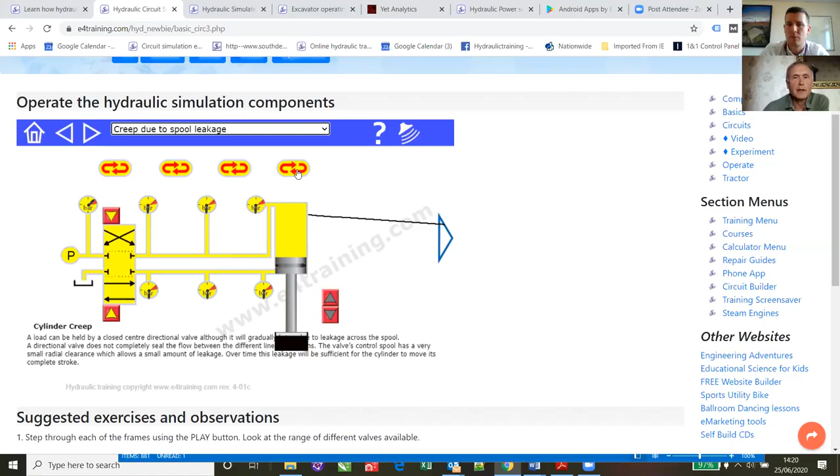So with training, it's a lot of knowledge-based learning. You can learn from books and lectures, but actually with engineering, you need experience to operate things. So what we can do here is build simulations of circuits. We can put in the valves. So we've got a lot of virtual test rigs where they're actually simulation-based rather than animation-based.

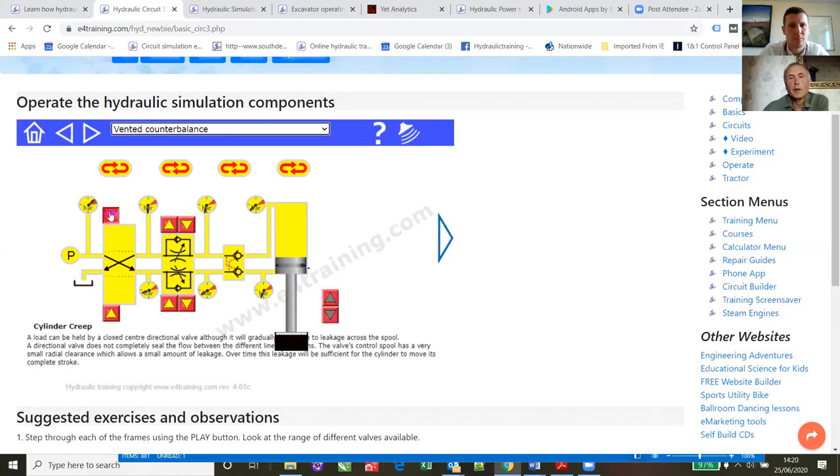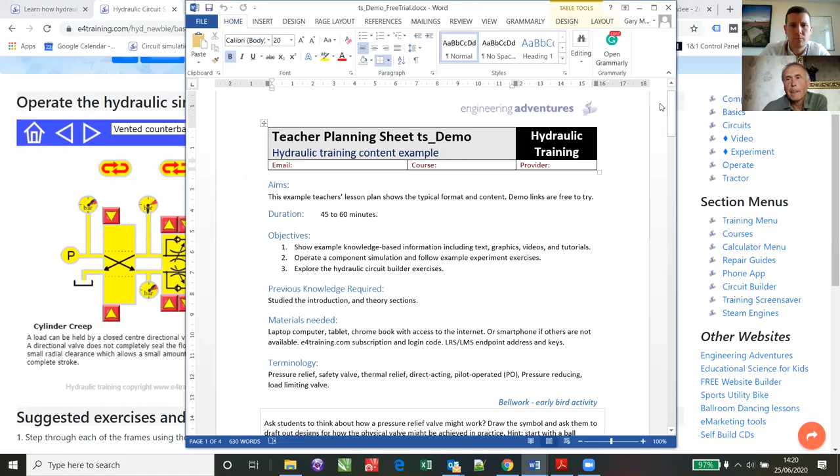You can change the features and operate the equipment. So it's nice and easy to do within a lesson. You can give the students little exercises to do. So we'll show you, hopefully, work through our lesson plans. We've got some lesson plans that take you through what you would do in a lesson and what you should be giving your students. So it's taking the hard work out and showing you some of the simulations.

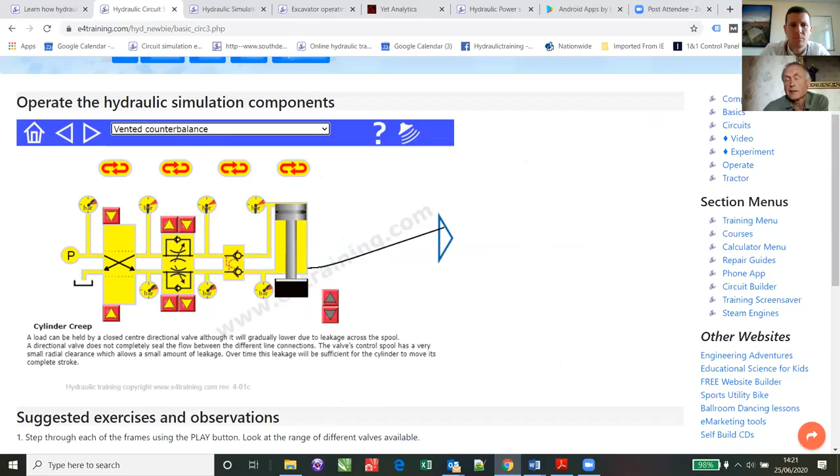So we'll just go through. I'd say that this actually is for classrooms as well as for COVID and working at home remotely now. I think I'm the only person who's been writing classroom lesson plans during lockdown.

But let's start with a website. The big problem with websites is that it's difficult to find information. So I'll just give you a quick sight of all the simulations and all the content we've got. So these are all the simulations. We've got calculators, lots of different calculators that you can use for checking if you're working in hydraulics or checking your calculations while you're learning.

Micro-tutor, but these are tutorials. So there's quite a few little interactive tutorials the students can do. Videos. There's an awful lot of videos now. And some worksheets. So these are the guides for doing things.

So one of the real benefits of teachers is that teachers are very good at sorting through and giving the students what they require. Websites, unfortunately, the more I put in, the more difficult it becomes to use. So it is a problem with websites. Hopefully I will show you how to get around that today, but one of the things that teachers do well is they know how to feed things to their students. And even now our lesson plans are hopefully good, but they're in Word, so you can adapt them for your students to show them how they do it.

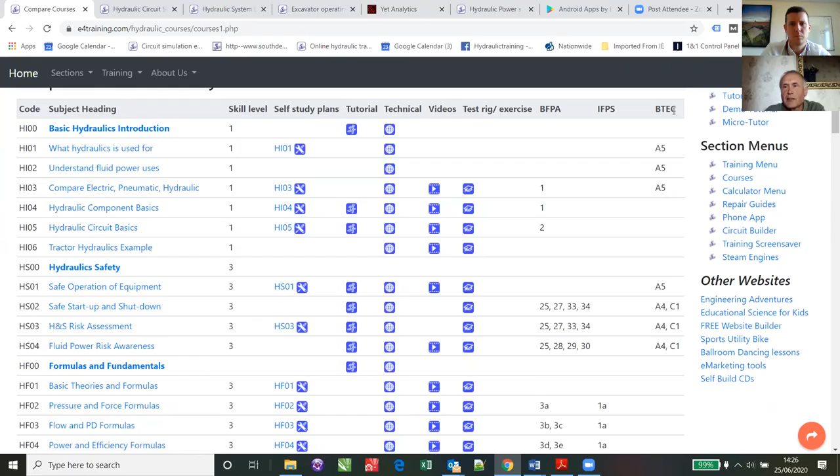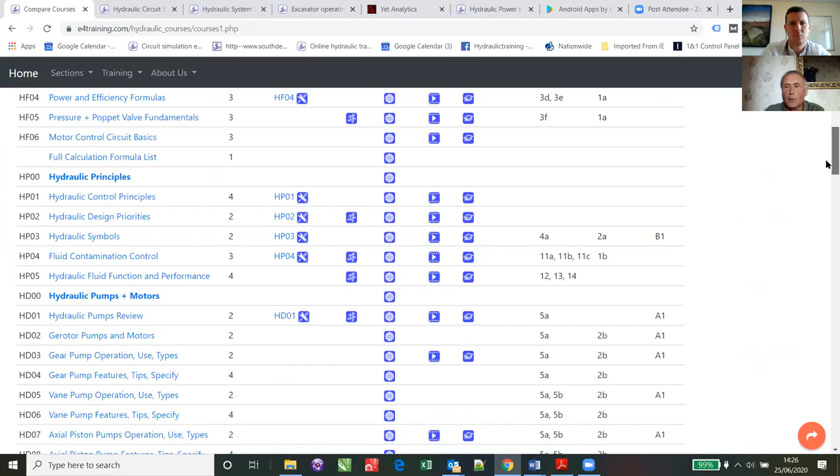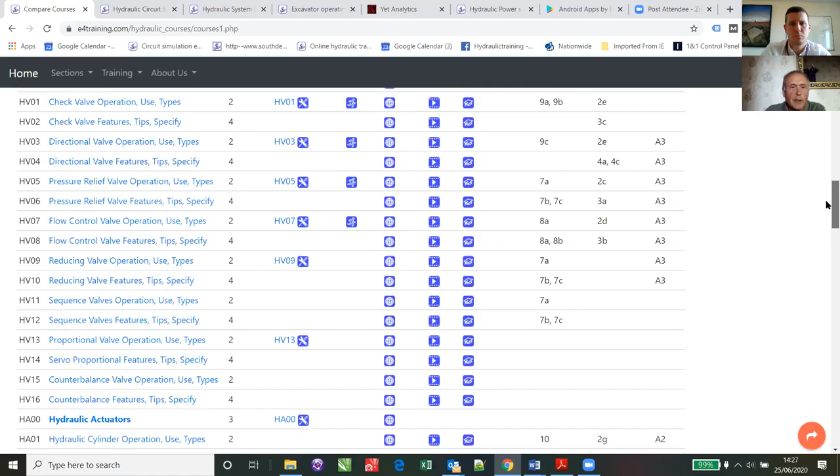So I've been through the BTEC syllabus, and there's codes within the syllabus. So I've tried to put those codes in here and what they relate to. So you can see that there's more information on the site than there is in the BTEC requirements. So we won't specifically go through the BTEC requirements today, but they are all covered within the course.

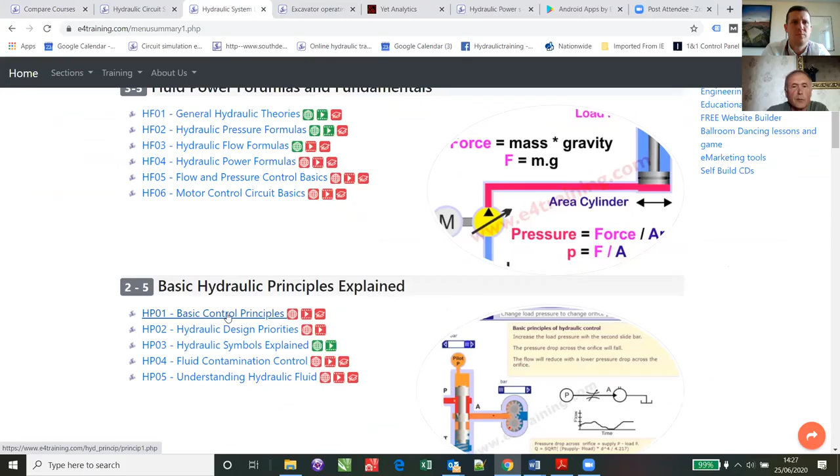So what I will do now is come back to this screen. We'll just take you through an example of the content on the site and how you can use it. So I'll just pick this one. This again is just all the different lessons. So we've got some structure in the lessons with different coding, and it's split into groups, which are quite common within most courses. So we have, again, just knowledge-based information. There's descriptions and text on everything, which some of the more able students may get into. This section is just about the principles of hydraulics.

And to be quite honest, the best lesson I ever had was from the director at Sterling Hydraulics, and he just said, oh, there's nothing to hydraulics. All it is is a spring against a piston. So you put pressure on a piston or a spool, you've got a bit of leakage, and you've got an orifice, and the orifice opens. And that pretty much summarizes all of hydraulics.

It's really simple. As long as you know that pistons are moving, so either cylinders or spools, and that's opening orifices. And as you get down through here, you've got a little chamber, so you put an orifice in to restrict the flow out, and you've got a time control, and you put a seal on, you've got friction and hysteresis. And to be honest, hydraulics is that easy. Everything else comes from that. And so that's a lesson well worth giving.

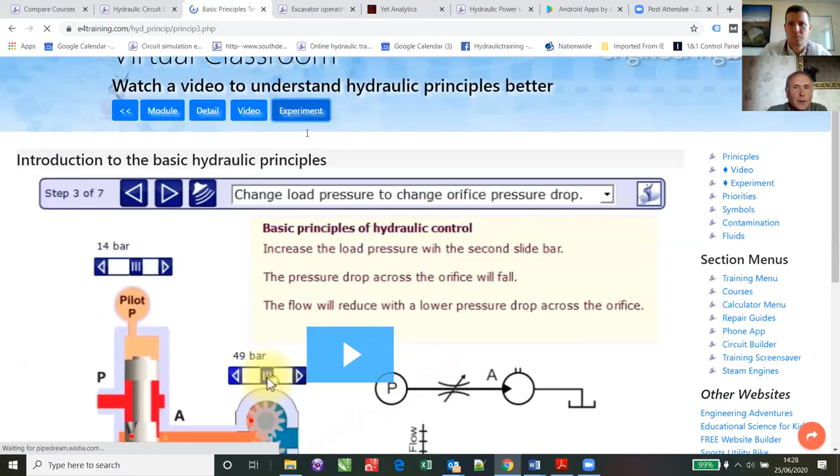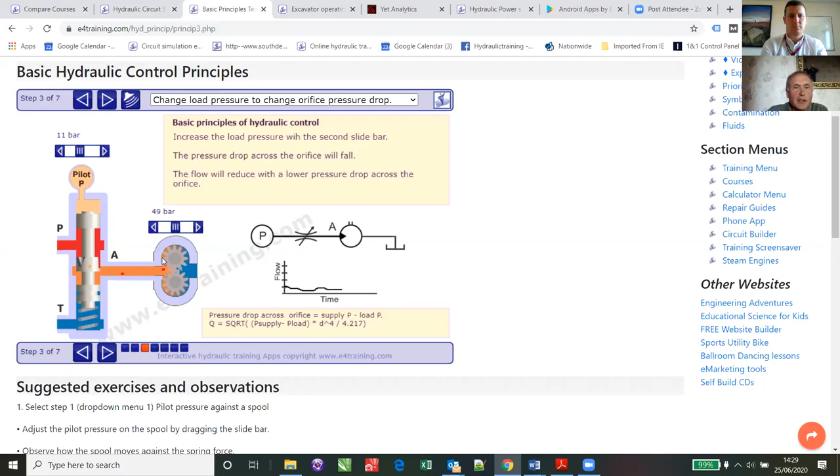We've got a video that you can watch, and it tells you essentially what I've just said. But again, the key thing is the simulation. So a lot of them now have sound. I'll talk you through it. Let's get to this. We can now demonstrate the theories that we've just discussed. So you can actually move the valve, increase the pressure on the top of the spool against the spring, so that moves the valve, and then we can change the load. So if we change the pressure on the load, we can see how that affects the pressure drops.

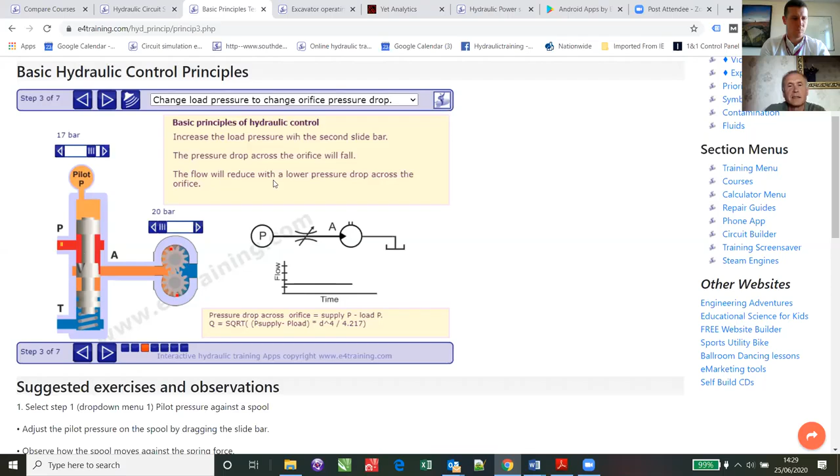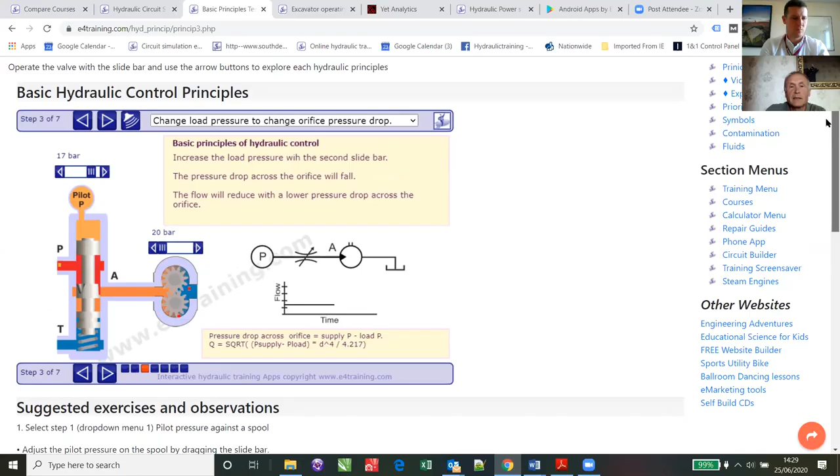So with all these little simulations, we're getting graphs and diagrams for the circuit and things. So it's just making a nice exercise, and you want to break your lessons down into little exercises, the points you're trying to get across. So each lesson we do, each subject has got the text-based information. It's then got the videos, and it's got a little simulation.

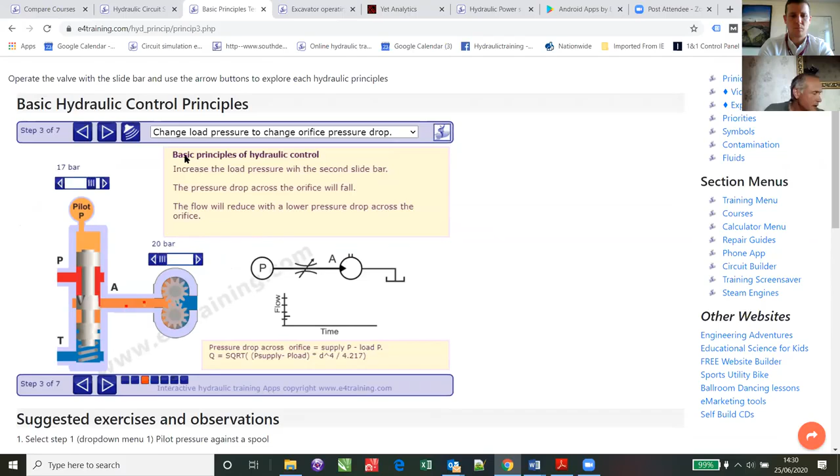And below the simulations, we give instructions for what you can do within the lessons, what you can ask the students to do. And there are questions, run a little experiment, ask a question and get an answer, which we do give away. So there's a structure to each lesson that you can run through. What we want is to end up with the students running little tests and exercises themselves and getting their own results. So that is the basic structure.

We'll just look at something a bit more advanced, because I know BTEC is very maintenance based, and a lot of the US people now are looking for maintenance based in the agricultural industry. So this is a nice little simulation we've got.

So essentially it starts with a game, because we're talking to students rather than people. I guess the BTEC students are not specifically going to work in the hydraulics industry. So part of the reason, certainly in the States, is to engage children in hydraulics and realize how much fun it is. And hydraulics is the best because you get to drive the biggest machines, the most powerful robots.

So essentially, initially, we've got a little game for them to see what happens. They've got cab, slew, and the arm extend, and moving the tracks. It's just a bit of fun to get them interested at the lower levels of school. Then we dig a little deeper. So now we've got the 3 controls again. We've got the track control, we've got the slew control, and we've got the arm extend control.

And when we move these, we can see the drive is by hydrostatic transmission. So clearly there's text to go through this, and it's a bit too complicated just to run through in a little webinar like this. But what we can do is we can follow the signal through. So we've got our electrical signals that are coming here. We can see how the valves move within the system, and we can see how that changes our pump settings. And that goes through and changes our motors, drives, and our hydrostatics.

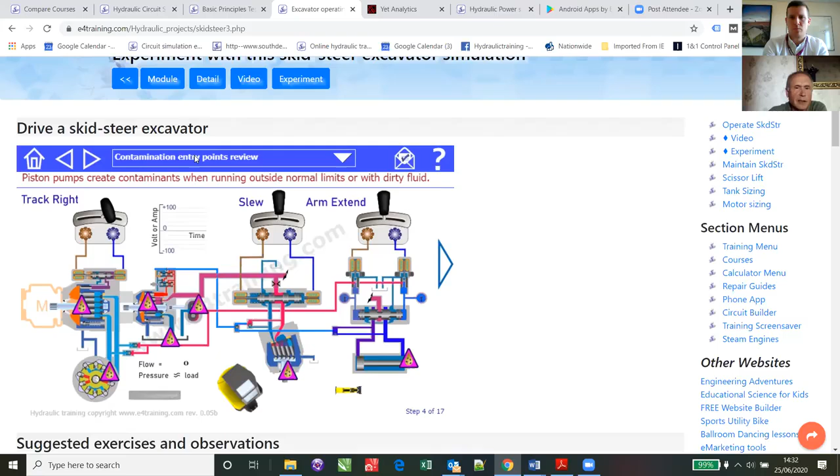So we've got another system here, which is a load sensing system. Again, it's a bit too complicated to run through very quickly, but it shows us what's happening. And we get lots of little exercises. So now it's showing us where the contamination entry points are. Contamination is a theme that comes up all the time in hydraulics because it is the biggest killer. And then you get some exercises for the students to find the points where the contamination is generated.

So we give examples of things, and then we ask them to run things, and we give a score when they've done it. So there are a number of these exercises as we go through to identify different components within the system. What are we doing for time?

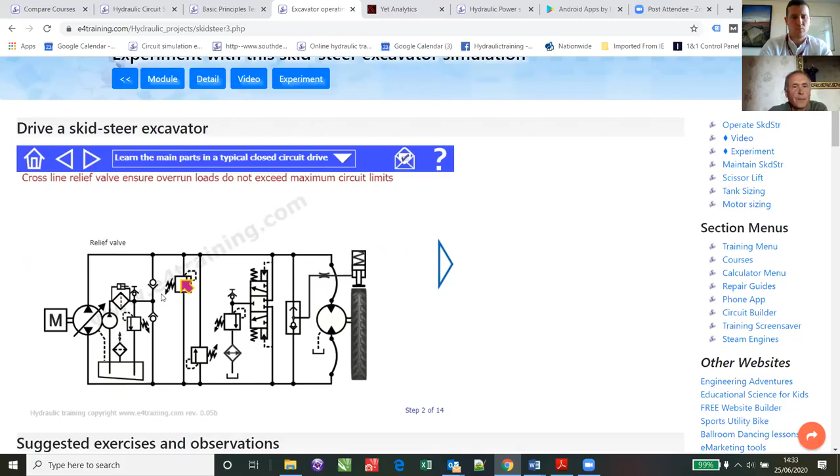Our next stage then is to go onto the circuit for the hydrostatic system. In its basic mode, it gives a mouse over that just shows you the components and what they do. Then we have a little exercise to identify the pressure control valves in this case. So that is a pressure control valve, we get a point. That's not a pressure control valve. So again, it's just a little exercise because if you make the students do things, then it makes them understand a little better.

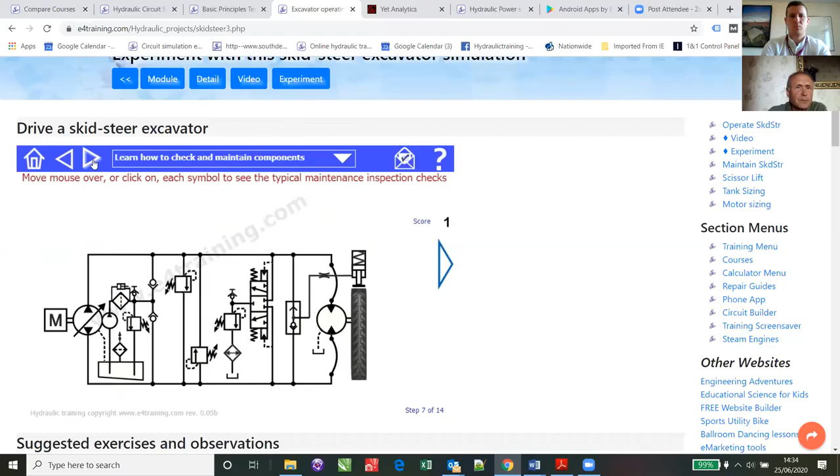We've got identifying flow control valves and a few things. There's build the circuit, which, again, just reinforces that you understand what the components are, which you should have learned if you had a bit more than 5 minutes. And then we've got a little maintenance exercise here as well, where if you've got to do some maintenance on a vehicle, one of the things you would do is look at the filter clogging indicators. For short-term maintenance, you wouldn't check your relief valve settings, but it's just another little exercise to encourage or teach people what they should be doing during maintenance.

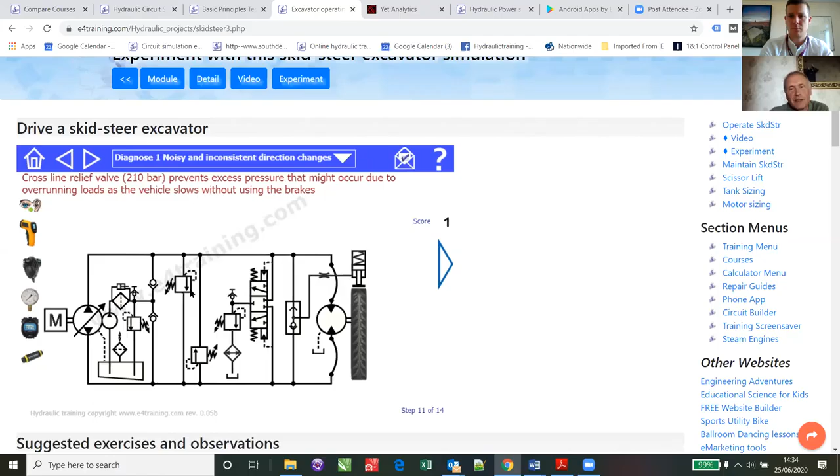It's difficult this, I'm not getting feedback. I'm sorry if I'm rushing. I really am rushing through. There's a lot to take in here, but I'm trying to give you an idea of the type of content that's here without actually giving you any chance to really understand it or appreciate it.

But here we've got some issues. So there's a fault with this circuit. We've built in a fault, and you can go around having a look and see what the problem is. And when you find out what the problem is, it's the filter was clogged. I know that. So you click on the component that's right. If you click on the wrong component, it says no. But we've got a number of exercises here where students can diagnose things.

Now, once you've completed a number of exercises, or probably you just give the students one exercise, we're building in, it's not in all the systems, an LRS posting. So for those of you that are familiar with learning management systems, this is the new form of results post out from apps. It works really nicely. So what we do is we post our results out, and then we go to our learning management system, which is hidden below my screen. So I'm going to have to pull that down to see it.

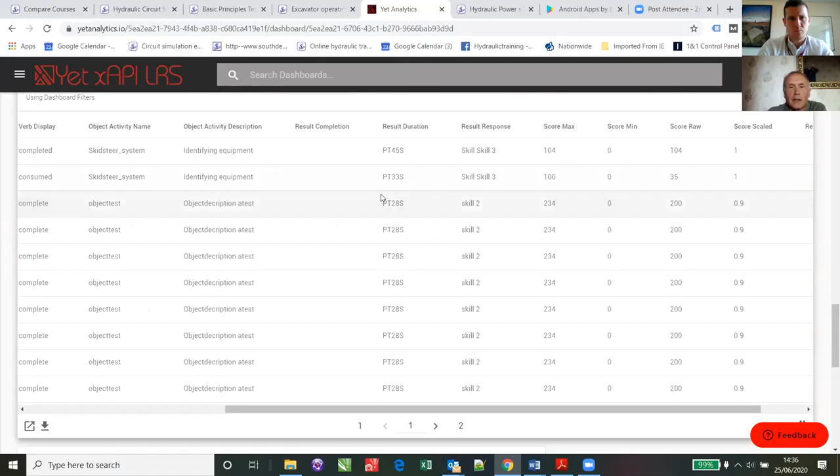So that result has just come through at 2:35. Yes, it has. So I completed on it, just the one I tested before, and it gives me the time it took me, various bits of information about the skill level I achieved, the time it took, the score I got. So if you are teaching lots of students, hopefully you're familiar with these learning management systems and learning record stores. It's really nice.

So you can give your students a series of tests to do and experiments, and then check their results automatically in your learning management system. So that's quite a nice thing to do.

Gary, can I just, there's one or two questions come through, some of them to myself privately. Okay. As you're talking, I'll address some of them probably towards the end, but some of them might be better being addressed now. One question was whether measurements can be changed to imperial values, for example, from bar to kPa or PSI. Is that at all possible?

Yes. Yeah, I know that's a common question, and we do offer. It depends on the different apps. Most of them have a little button. This one doesn't, because it doesn't have many figures in it. I'm not sure where it is on this one, but yeah, a lot of the apps have a little imperial to metric units swap over, and if it's not built in here, it will be.

I think there's no units on this, so it didn't need them, but this was for a US client, so it will be imperial based. By default, they come up as metric, because having been old enough to have worked in imperial units, metric is so much better. So my default is metric, but it will do imperial.

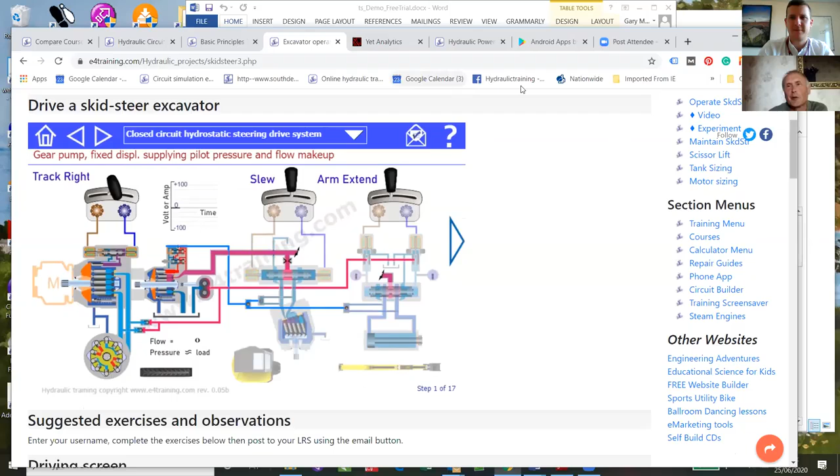Okay, that's great. Oh, in fact, there's one more that's just come in. We'll have a look at this now. Can this be integrated for learners using servo electronic controllers and stepper motors at all? Yes, there's some on proportional and servo. It doesn't go too highly into detail on that at the moment with exercises, but that's one area that I do need to improve. Stepper motors we don't cover because they're electrical.

And the next question probably is about the electrical side of things, because it's still quite light on electrical information, but CETOP are publishing their training requirements for electrical and controls. They should have done it by now, but it's due out at any time. And I think I'm going to follow that, because there are so many different types. I really don't know where to start. So I'm going to see what they say and follow their guidance, because I quite like what they do. So that will come in.

But if there are areas that people need, then we do tend to add it. I do like to add things. So yeah. Thanks, Gary.

That's fine. The next section we'll show is on circuit design, because I know in BTEC it's quite focused towards drawing circuits and designing circuits. Personally, I think I've designed very few circuits. No one really designs circuits anymore, because from my way of thinking, it's a bit like chess, in that a grandmaster in chess will have 5 moves that he can make, and he'll know that in 5 moves time, each move will give him a different outcome, attacking or defensive. So he's thinking 5 moves ahead, and he can't make up new moves.

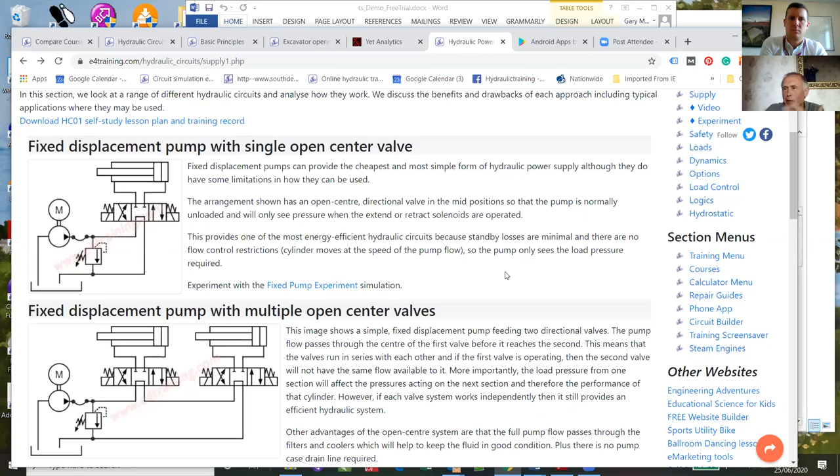Certainly, I worked for Rexroth and Parker and Sauer-Sundstrand, and there's always experts in every field. You don't get a chance to design anything because someone's done it before. You just go and look up and talk to the people that have done it before, to make sure you fully understand all the nuances.

So we've got a series of pages here where we cover different circuits. This is for power supplies, so you can see there are lots of different ways you can run the supply systems, with load sensing, with accumulators and fixed displacement pumps. And I know one of the key things that we'll need to look at is our circuit simulation program, which actually, it's too complicated to put imperial units into this one. And this is the only one where it's just too complicated.

I'm afraid it has to be metric units. So this is a circuit builder. You can build your own circuits, but essentially you can select them from the drop-down list and operate the system. So if we've got an open center system and you try to operate your valves, you can't operate both valves unless the other valve is in the right position. So you can use it to understand the different circuit logics.

It's very simple. I know a lot of people have got FluidSIM and the other circuit simulation programs. I love circuit simulation, but in my way of thinking, it's really inappropriate except for very advanced designers. I only ever use it on proportional and servo systems when you consider fluid as compressible and you're really looking at the performance of valves and how accurately you can control something. This is designed to be very simple.

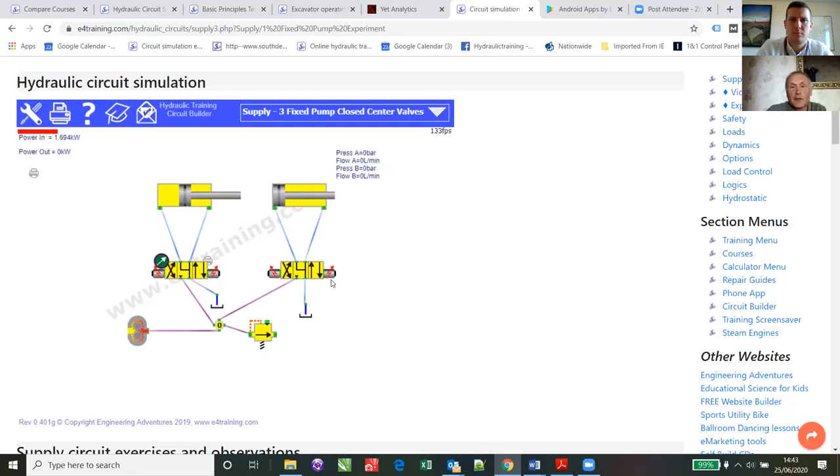And there's a lot of things you can do in it. We can build in diagnostics. So clearly there's something wrong in this system. I'm not sure what it is, but probably there's too much pressure and it's causing negative pressures. So you probably have to change your loads to get the system to work correctly. But again, it's nice to do within our lesson plans.

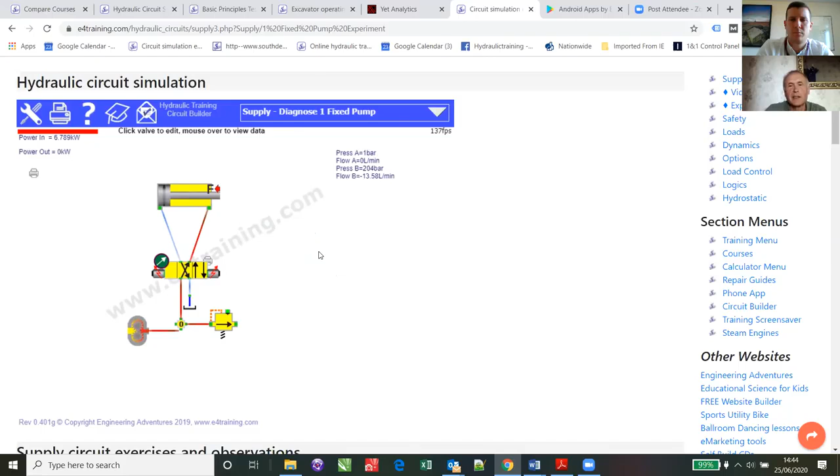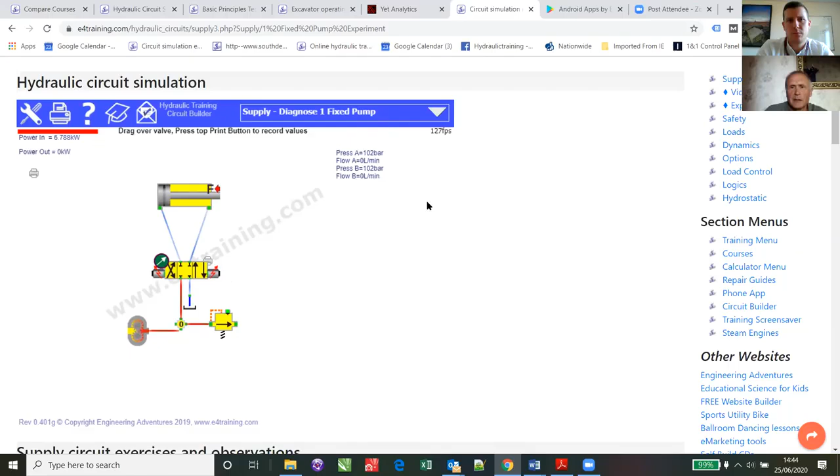We give exercises to do. So if you've been studying loads on a cylinder or something, then you would give them a little exercise and they would need to make the modifications to the circuit, which might only be a center condition or something like that in the valve selection. But it's a nice way of doing it, and there aren't so many things that they can do wrong that you get in a larger simulation program. So that's really where that is.

Gary, just a quick one. I want to have time for some questions, if there are any further, which I think one or two have come to me, and time for me to just talk to people about how the licensing structure is going to work, for example. So do you think maybe 5 more minutes or so to go through a few more things?

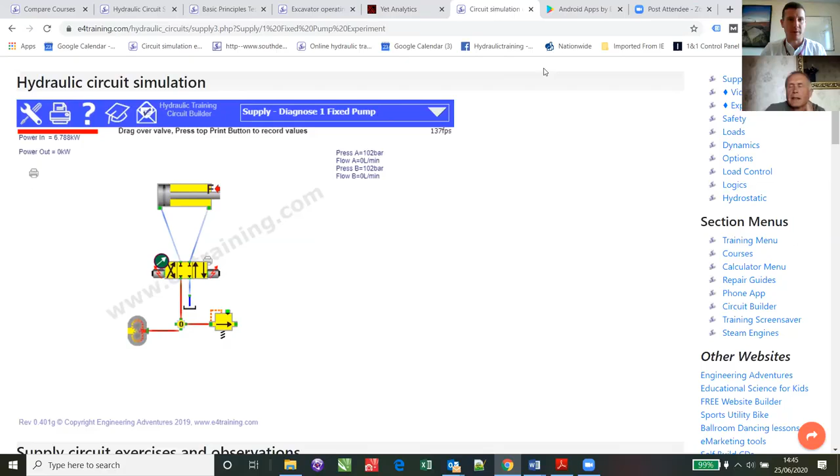That's exactly the only other thing I was going to say, was that there are mobile versions, phone app versions of a lot of the software, because I know a lot of people now use Chromebooks in the classroom or need to take it home or whatever. So all those things are going to be available. For teachers, there will be a special page where only teachers can access the lesson plans and get unlock codes for some of this software as well, and get some of the downloads that aren't readily available to everyone else.

And yeah, I think I've covered quite a lot, and there's obviously a lot more there, but certainly if there are questions, that might be a better way to do it. Okay, thank you.

There was something I was going to ask you to build on a little. You mentioned it vaguely earlier on, and I do know that we have a number of people from various countries, UK, US, who are involved in agriculture and agri-tech, so to speak. Did you mention that you had some sort of relationship with a US group of colleges, and can you give us a little bit of background on that?

Yeah, in the States, there is money being put in to encourage people to go into the agricultural industry, to make hydraulics more interesting. So essentially this is why this simulation has been done.